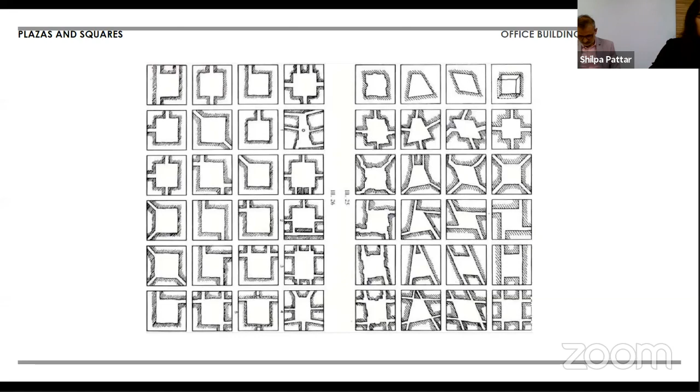So it is reminiscent of old European town squares that house various activities like Borough Market, pop-up food stalls, street performances, musical bonanzas, sport and cultural events, mini banquets, as well as informal outdoor Indian bazaars. Old European town key features like clock tower, town squares, sports zones, high streets, outdoor dining, garden spaces were part of our design ideations. Sketches that were to scale with workable floor plates and areas are displayed here.

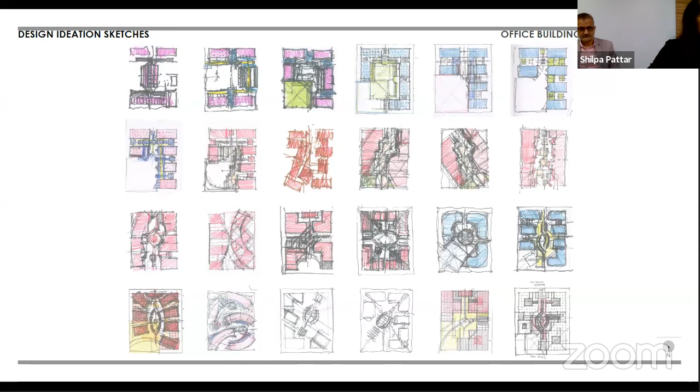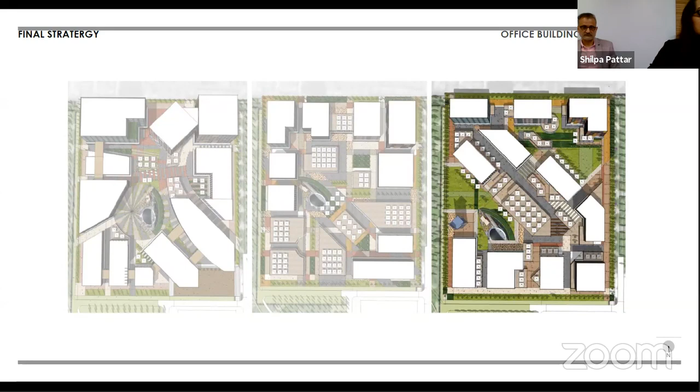So the final strategy consisted of 12 building blocks with varying heights, different facades, and peripheral buildings overlooking central building terraces and buzzing activities on ground level as planned. So that's the landscape master plan, capturing all the essence and medieval elements and textures and colors and activities that we intended to involve.

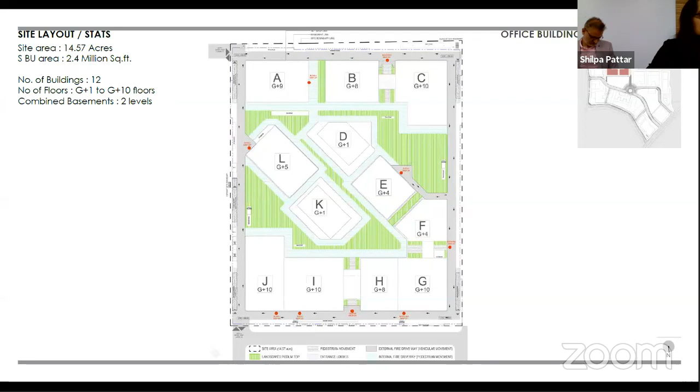So the site layout and the stats. Located in the ETV campus, Bangalore, the site area is around 14.57 acres and the super built-up area is around 2.4 million square feet, consisting of 12 blocks of varying sizes and height, the number of floors being 1 to 10 floors. The vehicular movement is restricted to the periphery, which is a one-way loop that consists of 5 ramps for the employees that enter the upper basement, and individual building blocks have drop-offs for VIP and specially abled on the periphery.

The central spaces and space between the building blocks are dedicated to pedestrian movement and various activities along with fire tender movement. All the building blocks are interconnected with steel bridges from 2 floors and above on alternate floors, which was a fire requirement, helps evacuation during fire emergency, and creates an interesting multi-level movement pattern between the building blocks.

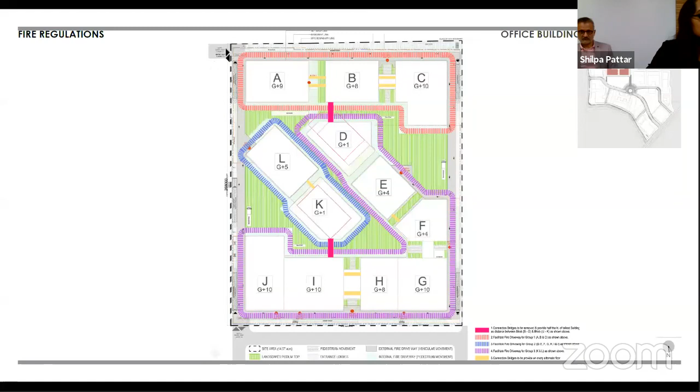Further, I would like to highlight that blocks A, B, and C combined together generate 0.8 million square feet, which was phase 1 of the project, to be completed within 2 years of the approved concept stage. Each block's floor plate size varies and hence the placement of cores varies. Buildings with comparatively lesser floor plates are holding corner cores to provide efficient floor plates for office space. The lift cores are built in RCC, fire staircases in RCC, and the central stairs in checker plate.

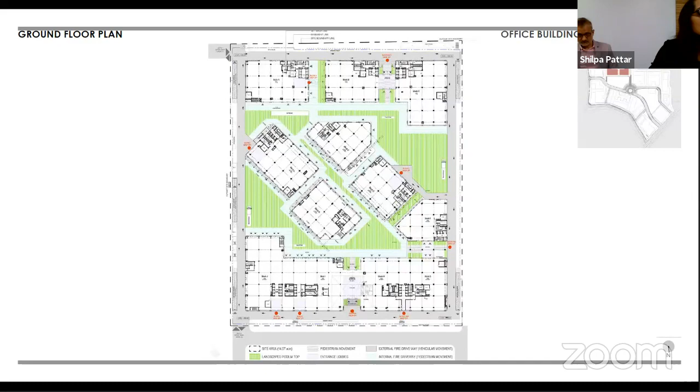The basement area extends to approx 10 acres with 2 levels. The lower basement is around 6 lakh square feet, and the upper basement is approximately 5 lakh square feet. Each grid is 11 meter by 11 meter. It's a typical section showing the bridge connection at alternate floors above the second floor, and the 2 basements, and the maximum height of the building is 46.1 meters.

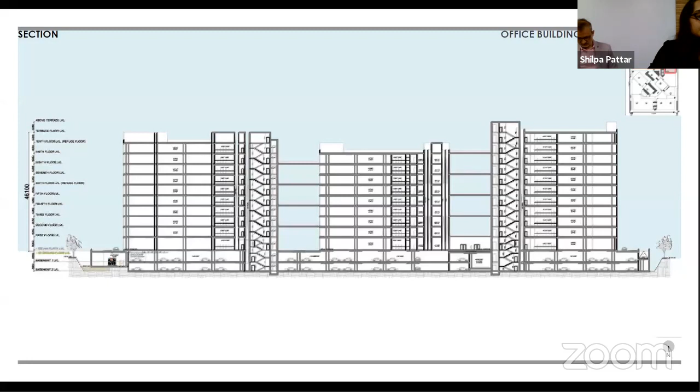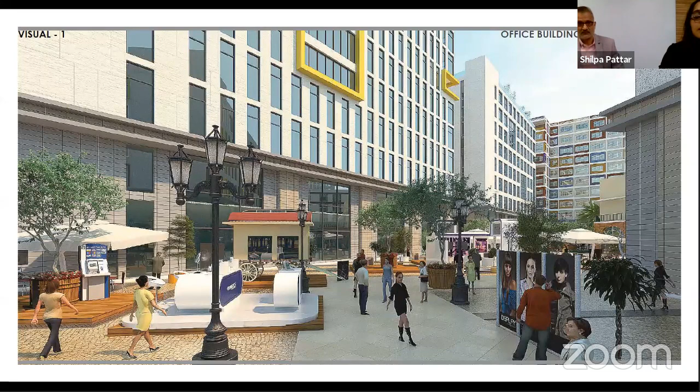These are a few visuals of the borough market, of the high street, sports zone, and the overall view.

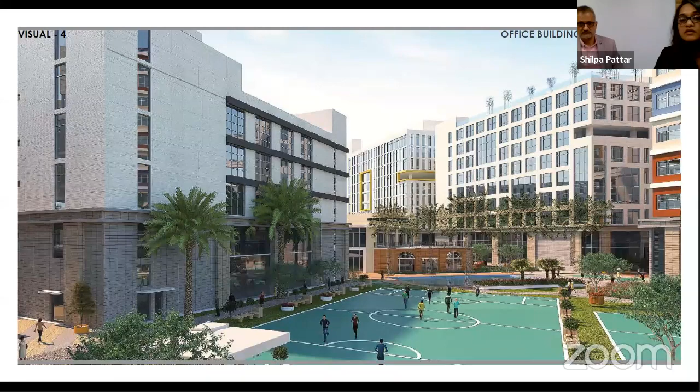Excuse me, there's some disturbance and we cannot hear you very clearly. Can you hear me now?

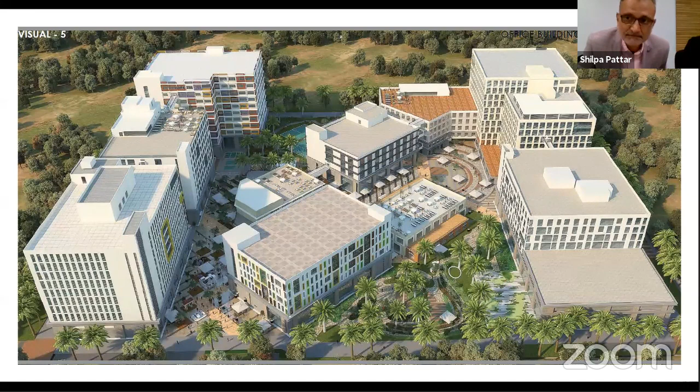Yeah, a little better. So I was just mentioning that since the extension of time was not granted, we were forced to have a very pragmatic system which would ease meeting the timelines. So the best approach was to do the basements in RCC with regular RCC columns, and it would have taken us 4 months to finish that construction, considering it is a 10 acre basement, but phase 1 is only about 1/3 of it. The strategy was, as soon as we finished the podium level, to have the precast elements ready to immediately, seamlessly put the structure up on the buildings.

So the final methodology and strategy was to have the basements with the RCC framework and the upper levels with columns precast in a steel fabrication yard, brought to the site and erected in no time. So this was a very big gain in time, about 4 to 5 months, where the steel structure and the superstructure were done in very quick time. So this does give an advantage of 4 to 5 months, if somebody wants to know what steel structure does as compared to RCC. Jatin and Mr. Hariom will also discuss what sort of complexity it brings. And so it becomes not completely a steel structure, but more of a hybrid structure, which is much more useful in the Indian context.

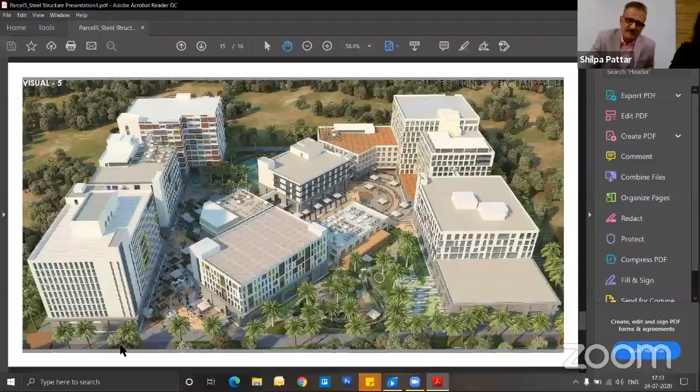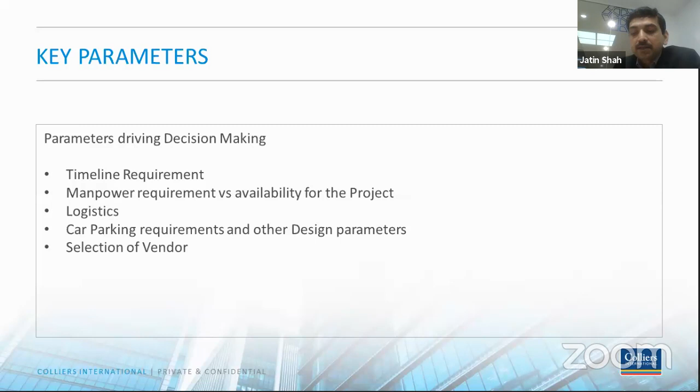And above all, when we evaluate a number of systems, we also have to look into what kind of vendor profiles we have in the country today, who are the capable vendors of doing this kind of project, and how many of them are available for executing such kind of projects. I'll move to the next slide.

These were the various systems which were explored. One was a conventional RCC system. You can see it's all completely RCC construction. The other option was a composite steel structure, right from the foundation levels going up to the terrace, where we have MS structure with deck sheets. Obviously, we all know about it.

The third option which was explored was an RCC basement, meaning the basement which is going below the ground completely in RCC and above ground in steel structure. Why was this option explored? I will explain in the next slide. And obviously the fourth option which was also evaluated was precast structure for the entire campus.

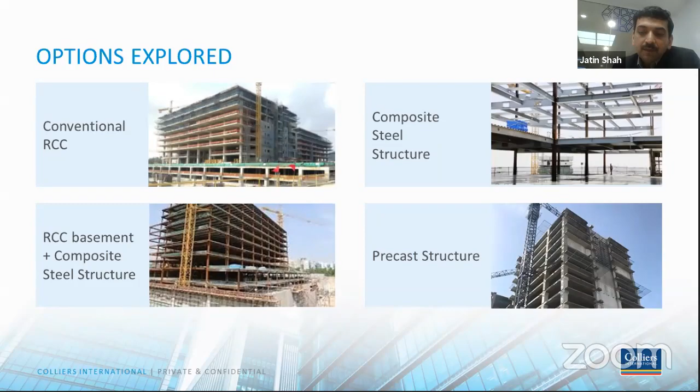Good. On the decision making, the key criteria as explained to you was the timeline. Now, conventionally in an RCC structure, we would have finished this structure in about 23 or 24 odd months, taking an average slab to slab cycle of about 20 to 25 days. In case of a composite steel structure, we could have achieved it in 19 months. And in case of a precast structure, we could have done it in about 21 months.

An RCC basement, we were able to do it in 16 months because this was an atypical situation where the excavation for the project was completed. We were ready to start the foundations, and between the stakeholder and the developer, the final level of discussions were happening on whether to commence. The moment we got a go ahead, by that time our RCC drawings for the basements were kind of ready. So we decided that we will not wait for the steel structure design to come up.

We will take advantage of site being excavated, and we will go ahead with the RCC works for the basement. And by that time, we will complete our design works, and then we will start taking up the steel structure as soon as our podium slabs are ready. So this decision led us to a constrained timeline where we took advantage of the situation, and by that we were able to finish the civil structure in about 16 months.

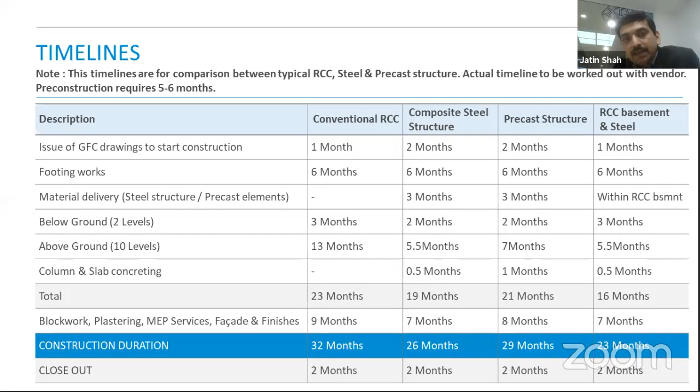I just want to project to you certain hard data that helped us to further plan the entire logistics or entire project. There was approximately 12,000 metric ton of structural steel to be used in this project. The reinforcement was about 11,000 metric ton for a 3 million square feet. So you can do your divisions and work out the consumptions which we had arrived at. Concrete, which was to be poured for this kind of structure, was 130,000 cubic meter. Had it been RCC structure, it would have been much more.

These were the certain parameters based on which we evaluated what kind of equipment or machinery is required, the skilled manpower requirement, the laydown areas for the steel structure, looking at the planning aspect that at no point of time the site should be deprived of material. It was not a just-in-time situation, because we also had to cater to what happens in case there is a breakdown or some situation. So we always had to plan for a minimum of 7 days of material stacking at site.

To see that there is no disruption during construction, there was mechanization which included cranes, hydras, mobile cranes, stud fixing machines, bolt connections which were required and cannot be done manually, the level of quality checks needed both at the factory where production is happening and at site, and emphasis on what kind of fire treatment the structure would require to comply with the important codes.

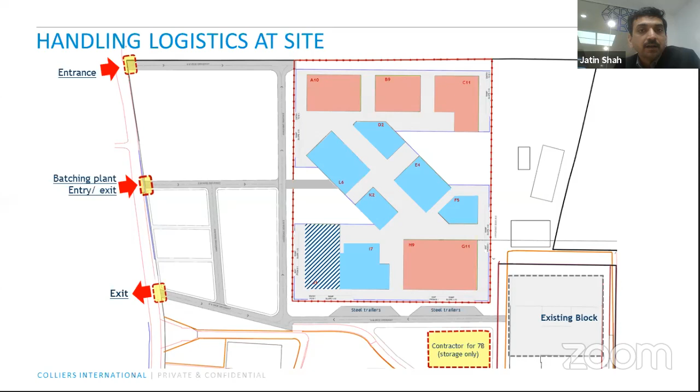We had an entry point. We had a dedicated entry for the batching plant material movement because of the capacity of concrete required day in and day out. There was pouring of concrete happening. We had planned a dedicated exit, so at no point was there a cross or any stoppage. There was always free movement happening. So this was how it was all planned out.

Reaching the project site itself, we had planned for tire cleaning, and barricading was set up. We had planned for three batching plants, but eventually we ended up having one 60 cubic meter plant and one 30 cubic meter plant at this site.

So the vehicles and materials could just move in and then come out of this campus. We had shuttering and other storage yards designated for the RCC works which was going into the basements. We had a laydown area of about 2.5 acres for the structural steel, which was supposed to come and be unloaded, as I mentioned, a 7-day stockpile here.

Apart from that, we had about 12 tower cranes, in addition to a mobile hydra crane of very high capacity, about 60 metric tons. In addition to that, we had 3 hydras to lift the steel from one location to another and to help transport and lift up to the required location.

The one big point which I missed out, which Mr. Hariom will also cover, is that for the first time we experimented with an M80 grade of concrete. This was used for the first time in this campus, in this building, to help the structural designers bring in the efficiencies required for the project. We had a lot of confidence in our design team, and that's how we proceeded with this kind of mixed structure, which is RCC in the basement and composite steel above.

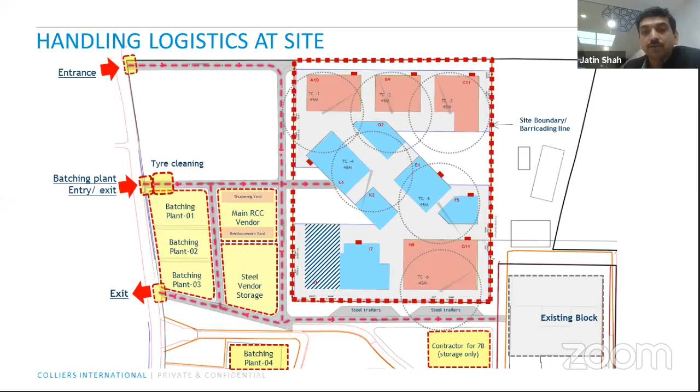So these are certain aspects which we went through. We also had Promat and Berger combination here, which is a UL approved intumescent paint applicator, who helped us make sure this treatment was happening in parallel to the construction going on at site.

I would show you some project progress photographs. It gives you a fairly good idea about the kind of work happening in this massive 14-acre project site, where every location had something happening - every day in one block, either the deck sheet, columns getting erected, foundations, or concreting above the deck sheet was happening. So the sequencing, the planning, the type of selections which we had eventually helped us a lot to reach this level.

There have always been, in any project, lessons learned, and just a few aspects of lessons learned which we can also discuss after Mr. Hariom finishes his presentation. Provision of sleeves during the design stage.

You would have seen the video how neatly the firefighting pipes were actually - by the usage of sleeves, we were able to take advantage of that height issue.

We would also recommend that in future, when a steel structure is being designed, a BIM consultant possibly will play a very important role here, because then your coordination aspects are resolved on day one, and it's not left to the site issue.

Another aspect - it may be recommended to have a second frame to hang the ceilings wherever required, or to hang the services lines, so that the main structure is not disturbed.

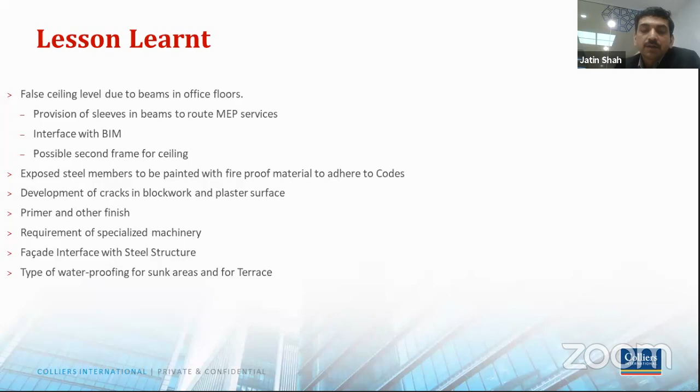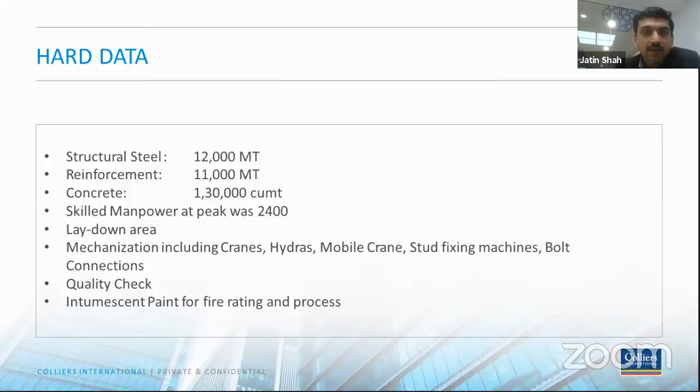I don't have the floor layout here, but Shilpa showed it. I'll try to see if I have the layout. No, I don't, but you can see at these corners we had the lift cores, and these were not centralized lift cores because of the way the buildings were laid out. In the central building, one corner shows the white color on top, which is the lift machine rooms, and the other corner has staircases being planned out.

So in this project, we had lift cores and columns happening in MS structure. The staircases eventually had columns and stringer beams coming in MS, but we also used precast here because the contractor was more comfortable having that. This kind of arrangement the structural consultant is happy about because it helps them.

But again, I will leave it to Mr. Hariom to take it forward, and I'll be open to any questions which I'll be happy to answer. Over to you, Mr. Hariomji.

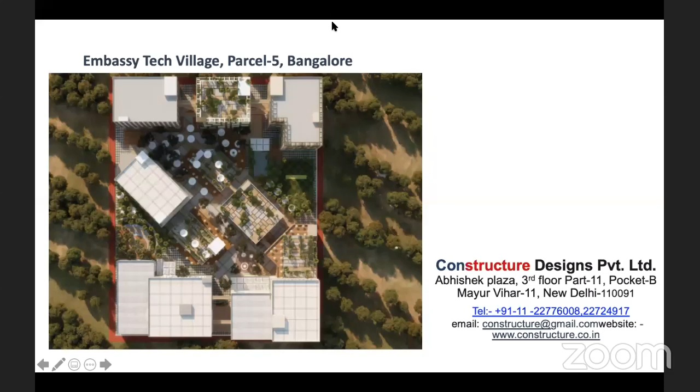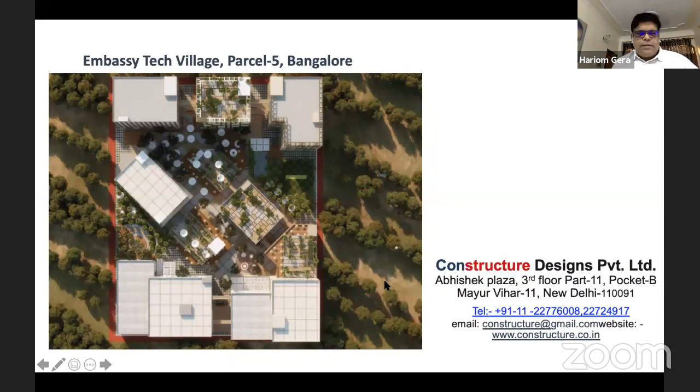Hello. Hello, yeah Hariom ji, your voice is audible, please go ahead. Actually, this presentation is not working. Is your presentation frozen? Then what you can do is unshare and share again. No, okay, no, okay, great.

Okay, the project brief is already discussed by Mr. Jatin as well as Mr. Anshu. Now I am discussing the structure of the project.

The structural system we have taken, because this building is in zone 2, is OMRF ductile shear wall. For one building, we have tried with the ordinary moment resisting frame, steel bracing, and the ductile shear wall. The primary frame grid is typically 11 by 11 meters, and this 11 meter is divided, with the typical span of the deck sheeting being 3.7 meters. The approximate consumption of structural steel is 9,900 metric tons, and reinforcement approximately 14,000 tons.

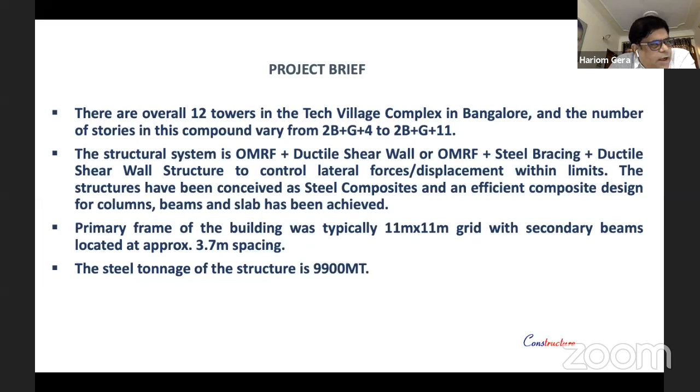Any composite construction is divided into two parts: first is the pre-construction activities, and second is the construction activities. In the pre-construction activities, the main role is project scheduling. Like somebody asked the question, we delayed the project 6 months because of the planning. That's where planning is the leading role of composite or steel construction.

Design as well as material selection also go with the speed. This is the material selection - like Mr. Anshu and Mr. Jatin also said, the facade system was not matching the speed with the steel. That's why after that, we advised the client that generally you will choose the facade as a glass facade, glass structural system, or any precast system which can match the speed with the steel construction.

Third thing is the fabrication drawing. After design, we go to the fabrication drawing, which goes to fabrication. Fabrication is a very critical role, because in fabrication we require at least 3 months to get the material at the site. So proper project planning is required.

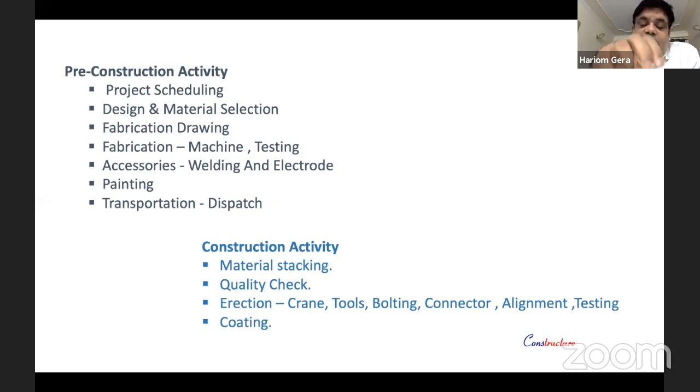And in the construction activities, the first thing is the material stacking. When we are receiving the material, material stacking is also part of the planning. Sometimes the fabricator has dispatched the material for the lower floor first and the upper floor later on. Then we can stack the lower floor material on the lower side, and the higher floor material at the upper side. Then at the time of erection we can easily find our material, so this material stacking planning is also required for speed.

Again, this is the quality check. When we receive the material at the site, we can start the inspection. First is the visual inspection. Then we can check the dimensions. Then we can check the welding thicknesses, the bolting length, bolting dimension. And some non-destructive testing can be done at the site, like magnetic particle test, dye penetration test, ultrasonic test, or radiographic test. This goes according to your QAP, quality assurance plan, and this testing is required for quality purposes.

After checking the quality, we can go to the erection. With the erection, the first part is the planning of the cranes. Mr. Jatin already explained the 12 cranes and the one mobile crane we used in the Flipkart project. Tools like stud welding machines and bolt tightening machines. Then we require the bolts and shear connectors, and after the erection of the building, we can survey the building, like alignment. After erection of the building, we can start the coating at the site: intumescent coating. The two types of intumescent coating we can explain later.

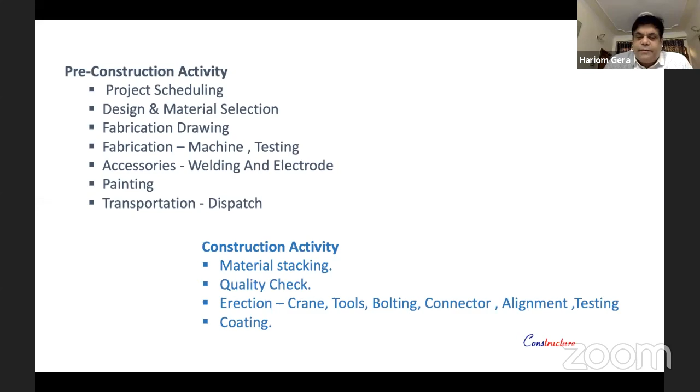The approximate basement size is 280 by 280 meters. This is a single basement without an expansion joint, and there is no leakage after construction. In the 280 by 280 meter RCC construction, we have eliminated the initial shrinkage by providing the shrinkage strip, and for final shrinkage, we have increased the reinforcement.

The bearing capacity of this project is 40 tons. So almost isolated footing is coming for the total project, because the maximum height is 2 basements plus G+11 stories. We have used combined footing and isolated footing.

For the concrete grade, we have used M30 to M80. M30 we are using for the deck slab, and M80 generally for the encasing of the column. Due to M80, we have reduced the size of the column to around 750 by 750.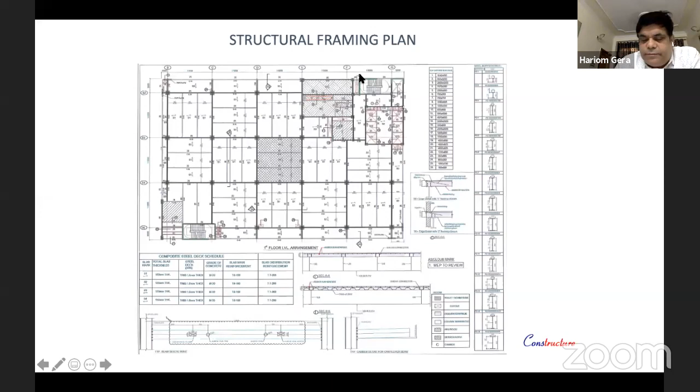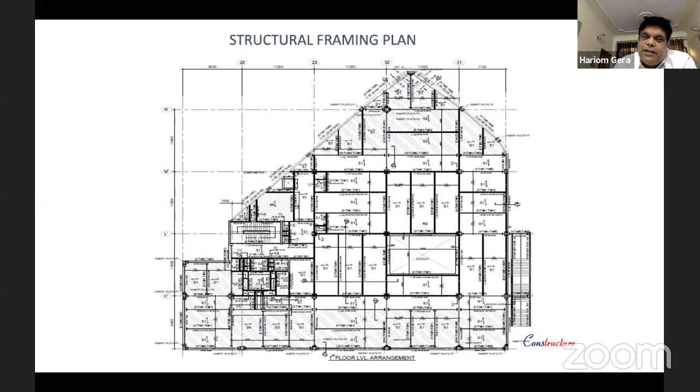There is the core wall in the corner. This is the minimum core wall required as a ductile shear wall for the lateral resisting system. This is the tower D framing. I am showing the incline because there is an incline in the plan. We can go with steel for any type of framing. This is the block F framing, and this is also the incline.

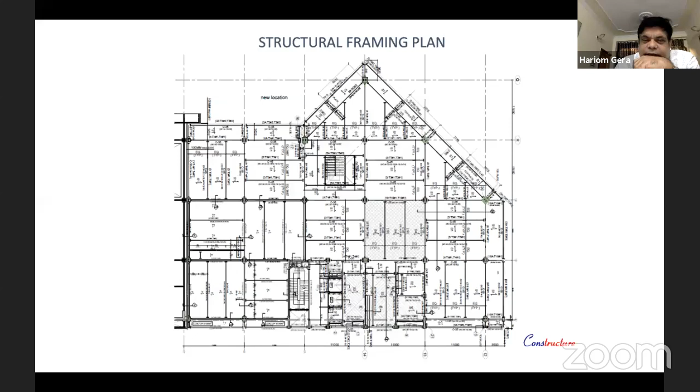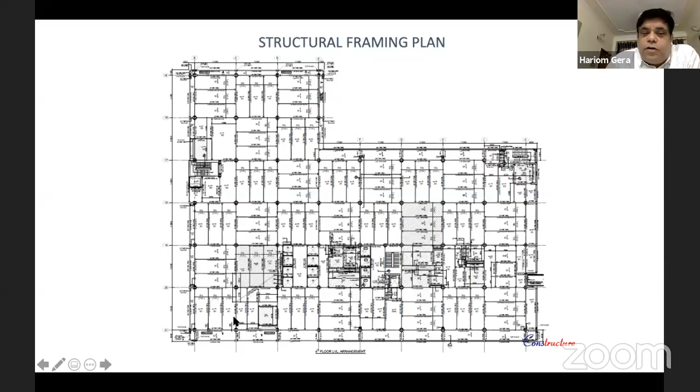This is IJ block framing, and in this we don't have much shear wall, as you have seen before. That's why we have placed bracing at the corner to control the drift as well as the deflection.

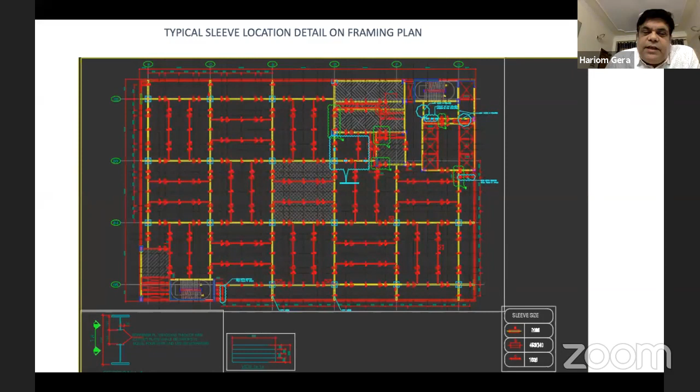This plan shows the typical layout of the sleeves for the services. We have given 5 openings in one beam for every service like firefighting, cabling, everything. We have planned the sleeves in both directions with the same length. This is the typical layout of the openings: 1, 2, 3, 4, 5, and we are staggering these openings to avoid overlapping.

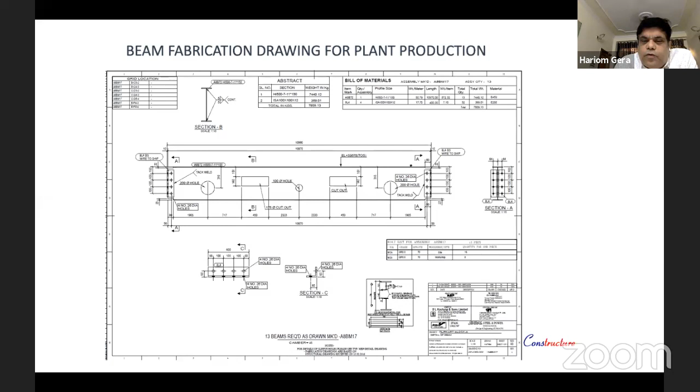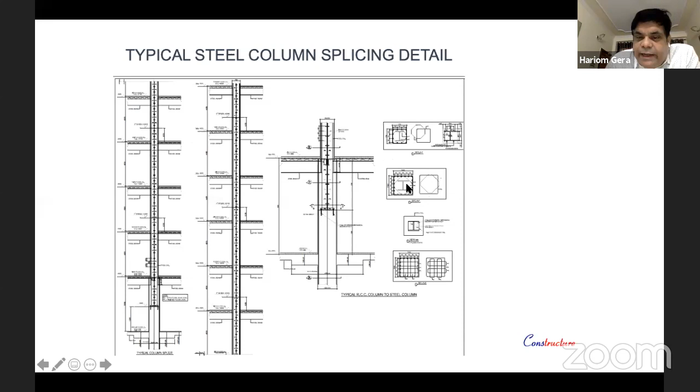This is the typical section of the column splice. We didn't give the typical base plate connection. Our steel column starts from the first floor, and we have embedded this steel column in the ground floor column until the force is transferred. The force in the column is transferred through bond stress as well as shear connection. This is the typical detail of our composite column.

Hariom ji, you've got only 5 minutes more. Okay, sir. Not an issue.

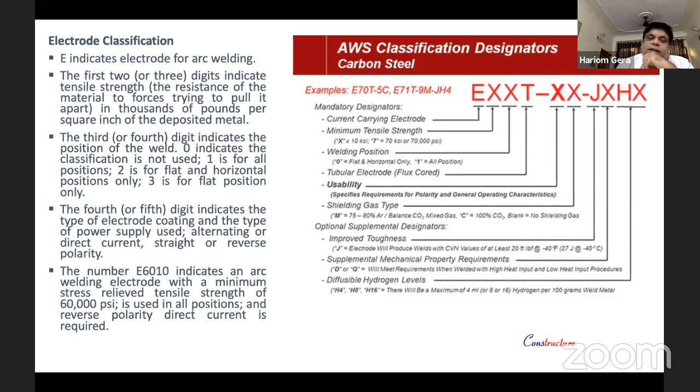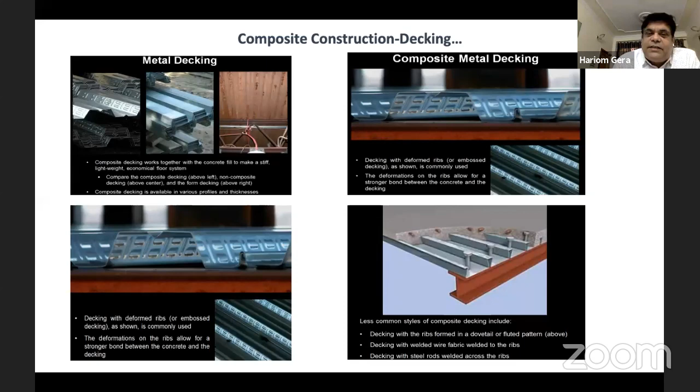This is a composite deck sheet. There are different types of composite deck, but we have used the Jindal TR60 composite deck. It is easily available in India. This deck sheet with 150 mm concrete over it gives you a 2, 3, 4, or 5 rating, and they have given the design based on BS 476 or UL section.

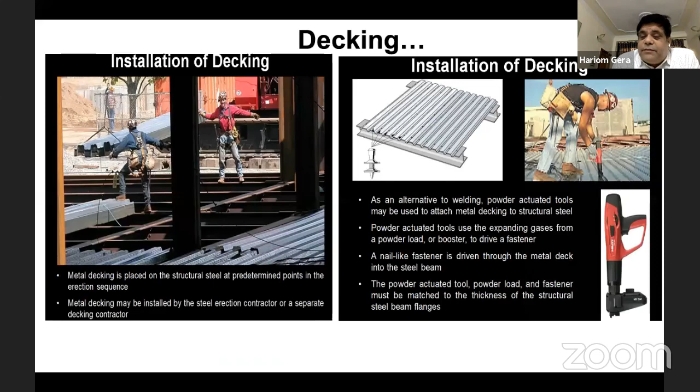After the decking, we can install the shear stud by the stud welding machine. This is a typical stud we have used. This is a stud we have used by the stud welding machine. Then we can go ahead with the installation of the concrete.

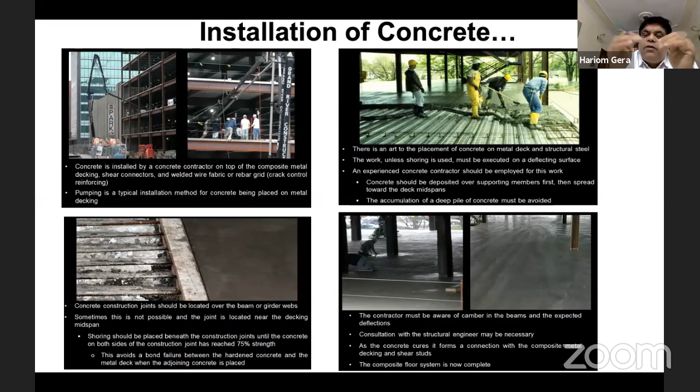With the installation of the concrete, sometimes errors are made at the site. They are pouring the concrete and they create a lump of concrete at one location. Due to that lump of concrete, sometimes deflection comes in the deck sheet. So you should ensure you do not store the mass of the concrete at one location, to avoid deflection in the deck sheet.

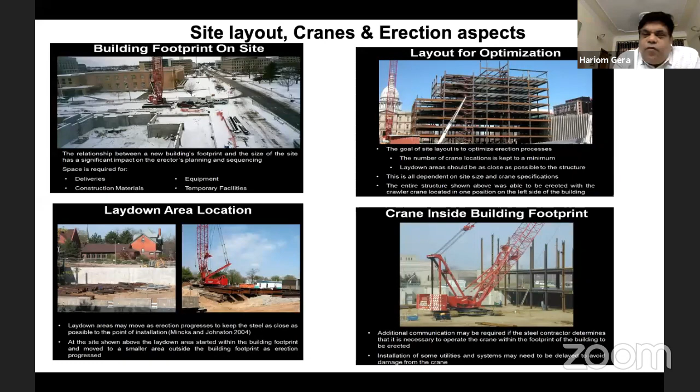Then we come to the crane. There are a number of cranes available in the market. We have used for Flipkart one mobile crane and 12 tower cranes. And for high-rise structures, we are using the tower crane.

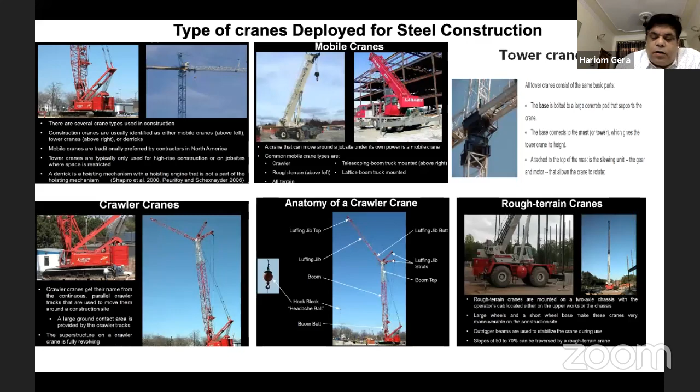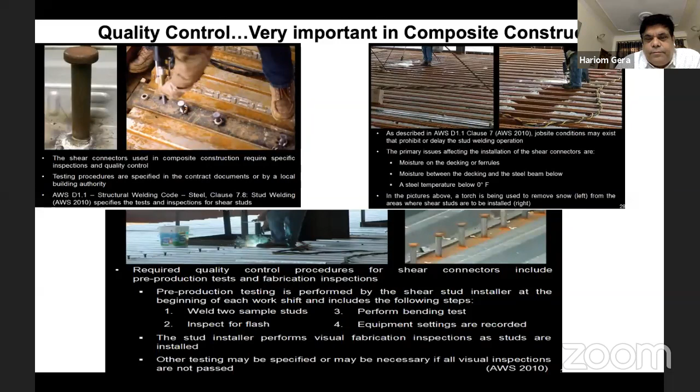This is the typical photograph for welding the plate. Preheating is required to avoid any bending at the side or loss of strength of the material of the weld.

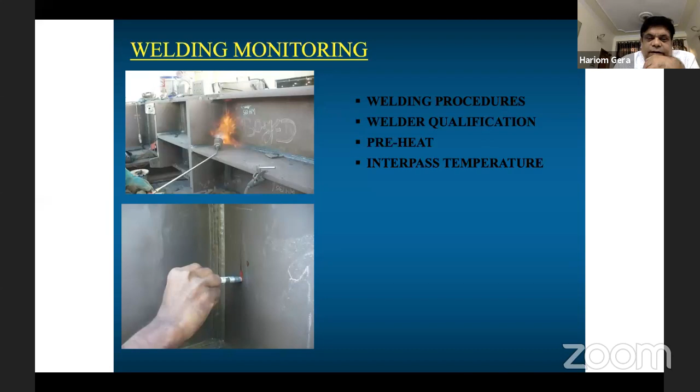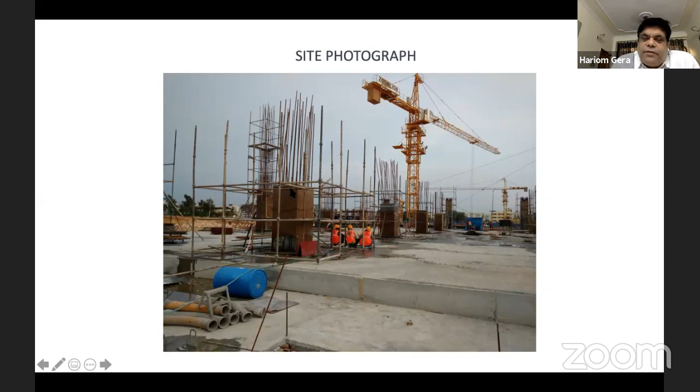Now we can start with some site photographs. This is the ground floor slab, and this column is cast. The height of the ground floor is around 5 meters. My steel column starts 2.5 meters above the ground floor.

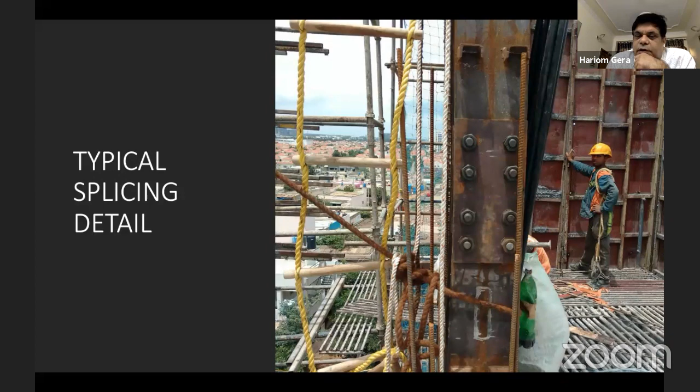This is the typical splice detail. Generally, we have placed the splices at 1.25 meters so that any labourer can easily do the tightening there. This is a photograph.

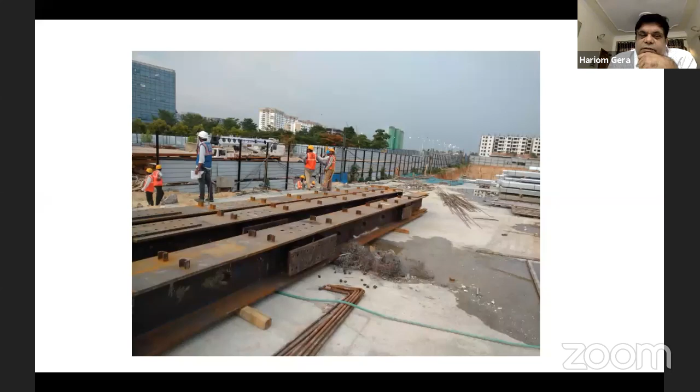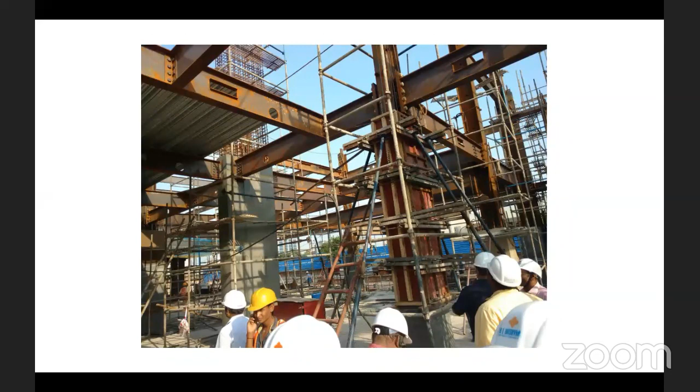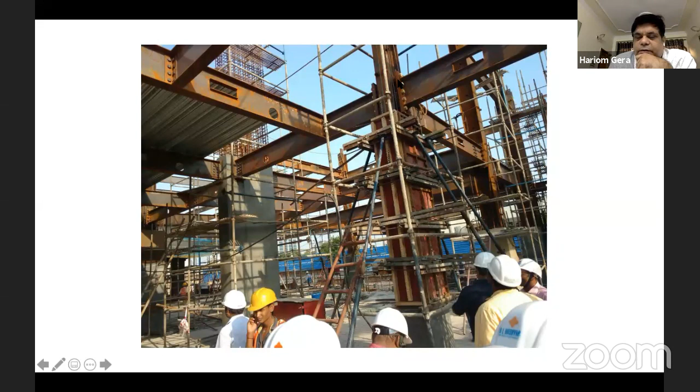This is the typical moment connection design. We have designed this as an ordinary moment resisting frame. This is my end plate, and one stub we have taken from the web, and my end plate is stuck on this web, and we have connected and bolted it there. This is the ground floor. There is a typical sleeve layout.

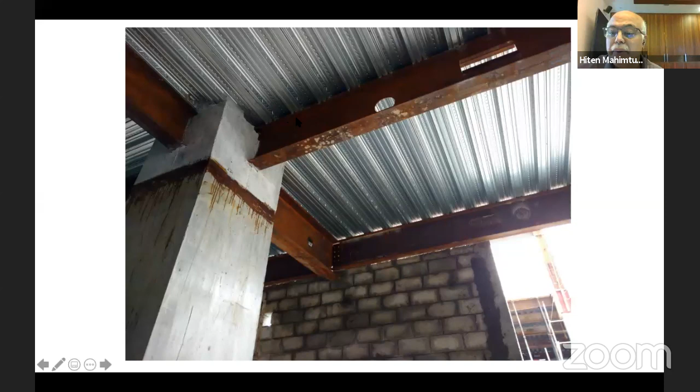Hariom, can you make the concluding remarks, please? Yeah, sure, sir, sure. This is only 2-3 minutes, sir. Only 2-3 photographs.

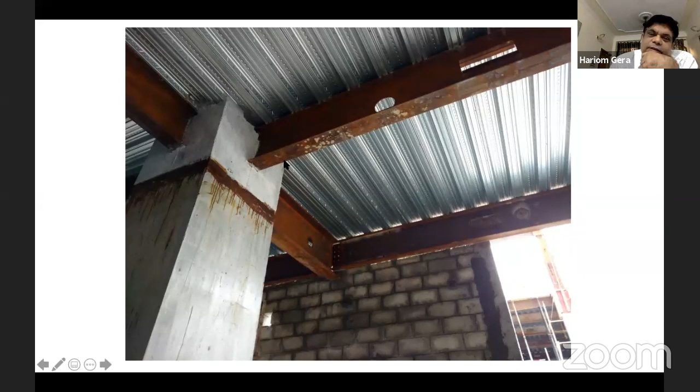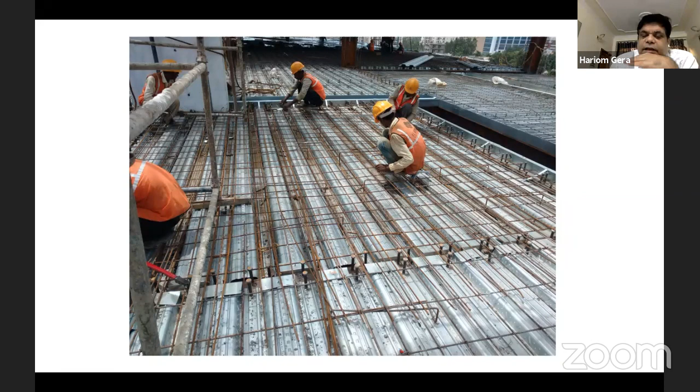Okay. This is a junction of the RCC column plus the steel beam. This is the stud over the beam. This is the placement of the reinforcement. We require only the top mesh for the deck sheet. Instead of the bottom mesh, the deck sheet gives the sagging moment capacity, so we require it only for the hogging moment capacity. And this reinforcement is required for the fire rating also.